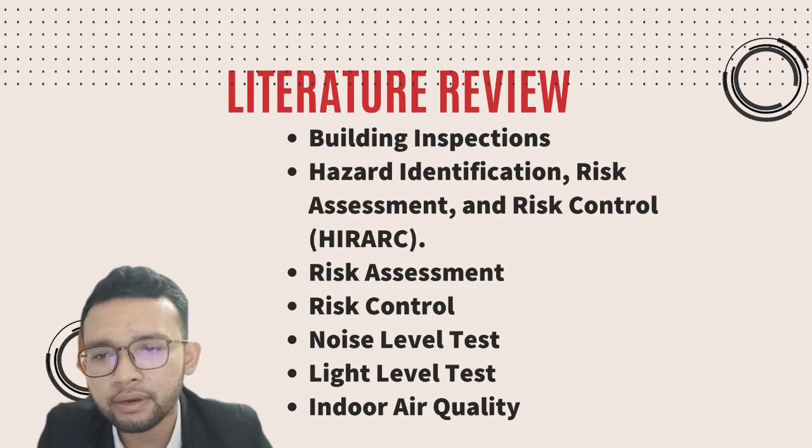Next is indoor air quality. Environmental indoor air quality is a critical factor in worker occupational safety and health issues. Carbon dioxide, or CO2, sensors are used in advanced HVAC systems to trigger an alarm and control airflow. Next, we move to problem statement and objective.

For the current scenario, PP Universal Engineering Enterprise, there are always challenges on the manufacturing line that may disrupt production output, and the workplace layout may risk the safety of the machinery and workers.

Second, workers will be exposed to hazard and risk when working with larger machinery, raw material, and tools. It may cause injury or death if workers on the production line are not reminded of safe work practice and do not wear personal protective equipment while working.

And lastly, the working environment in the factory. The factory has dust, and workers will be subjected to loud noise when performing welding, grinding, and machining operations in the factory. This issue may endanger the worker's vision and hearing.

During the grinding process, the worker's working position appears unnatural and uncomfortable.

How to overcome this: in the manufacturing line, a light and noise level test must also be performed to evaluate the current brightness and noise exposure.

We can also assist the organization in reducing and eliminating hazard and risk exposed to the worker by implementing hazard risk assessment. Next, we can also overcome this problem by ensuring all the SSOP related to the machine must be updated.

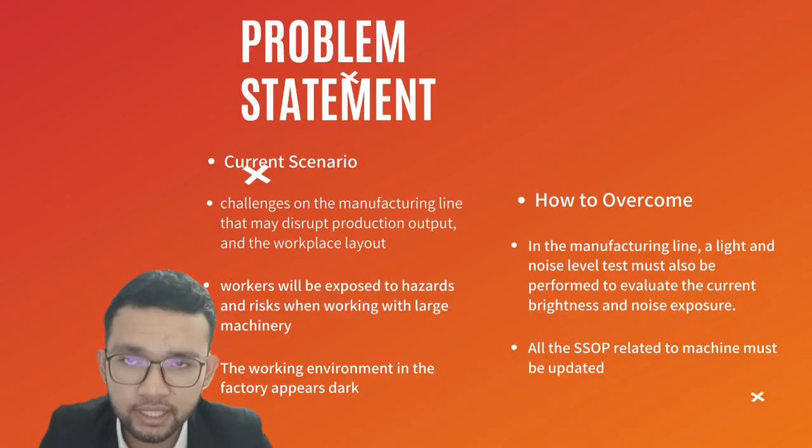Next, we move to the objective. The main objective of this study at the machinery company, PP Universal Engineering Enterprise, is first, to identify and analyze hazard and the potential risk to the worker at PP Universal Engineering Enterprise.

Second is to measure and analyze the parameters of noise level, illuminance level for lighting condition, indoor air quality, and risk level for working posture at PP Universal Engineering Enterprise.

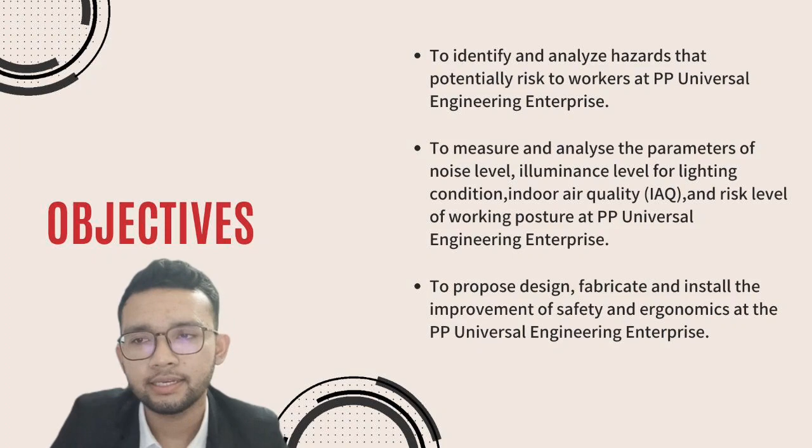The last objective is to propose, design, fabricate, and install the improvement of safety and ergonomy at PP Universal Engineering Enterprise. The scope of project and limitation of the project.

As a result, various parameters will be scrutinized during the process, including risk identification, noise level, light level, ergonomic, engineering, and administration. For the limitation, we identify cost and discipline.

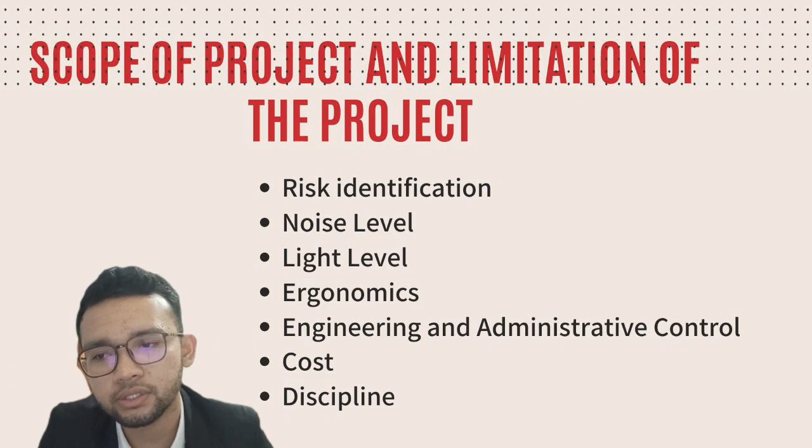Next, I will present the significance of the study. The first significance is to the environment.

This final year project study can lead to creating a safe and secure environment at the workplace so that workers can work safely without worrying about their safety when working. Besides that, the production of the product can also increase because no injury occurs to the workers.

Next is about economy. This project will help the company avoid spending extra money on ergonomic design and analyzing the discomfort and bad posture of the worker during working activity.

Furthermore, the company can also save the budget from spending on repairing damaged equipment if an accident related to the company occurs.

And lastly is social. This project will help the worker give full effort during working because they can do the working activity in comfort and with the right posture, so their body can feel more healthy, which can indirectly increase the efficiency of work.

For the methodology, we start with hazard identification, risk assessment, and risk control. Following the HIRARC flowchart, we categorize the work activity, then hazard identification, risk assessment, and followed by risk control. For the work activity, we carry out at machining, grinding, and welding area, due to this working area having high risk and high potential to occur hazard for the workers at PP Universal Engineering.

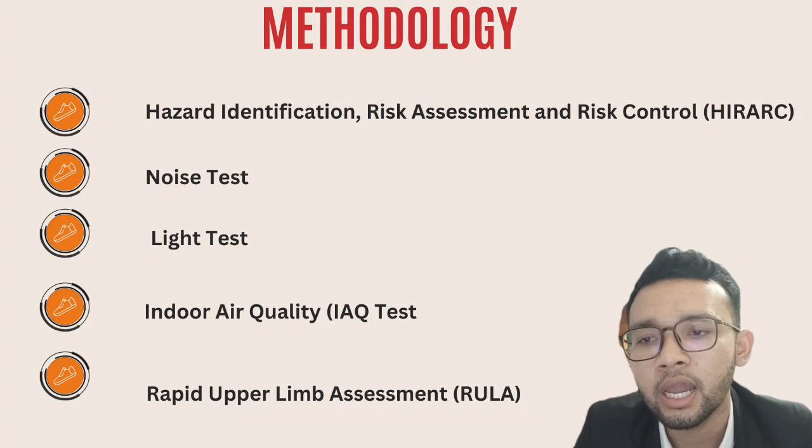And for the last is Rapid Upper Limb Assessment, or RULA. The working posture of employees in the production line at the equipment company has been chosen to be examined and analyzed in order to improve the health of the company employees. This is important to identify the posture of the worker during working and propose the ergonomic design to improve the safety and health for the worker.

Next, I will present the expected result. In this table, I have 8 risk control activities. First is analyze building inspection, machine inspection, and HIRARC. Second is analyze fire requirement for building and propose improvement related to fire requirement.

Third is sound level test for testing room and metal workshop room. Next is light measurement test at the testing room and metal workshop room. Next is indoor air quality IAQ test for testing room and metal workshop room. Next is analyze ergonomic at workplace by RULA and propose ergonomic design for machinery. Next is to design machine guard for protective guard, which is drilling machine, skinning machine, gas cylinder, and welding section.

And last is design the SSOP machine. For example, SOP for circular saw machine, lathe machine, welding machine, and milling machine.

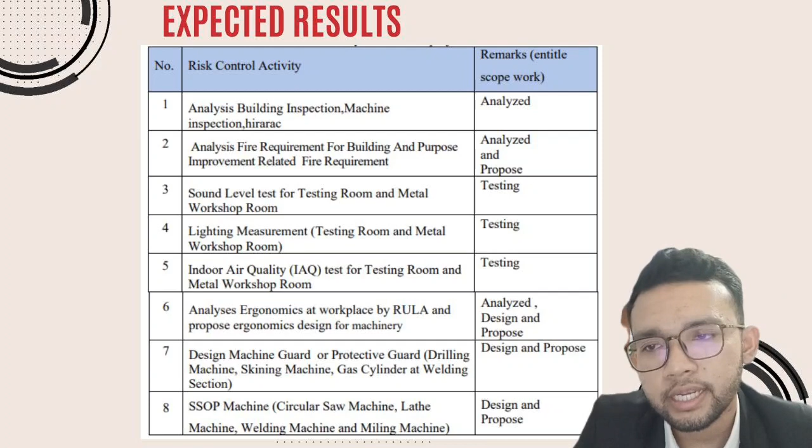This is the table for noise level test result. I selected different locations and used a Castle 6224 and Sound Meter Decibel Meter app to measure the sound at PP Universal Engineering. And for the light test result, I also used 3 different locations, and the equipment I used is Testo 440, and for the application on the phone it's Lux Light Meter Pro app.

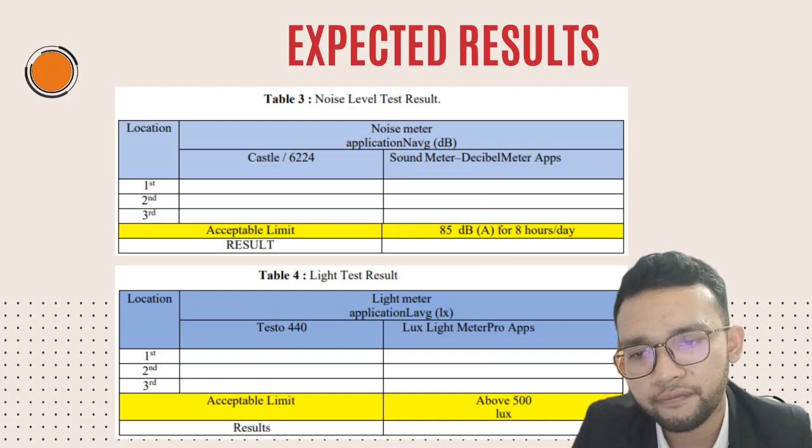So we can see that for the noise level test, the acceptable limit is 85 dB per 8 hours per day. And for the light test, the value must be above 500 lux.

This is the expected result for IAQ test. For the IAQ test, we measure the temperature, relative humidity, carbon monoxide, and carbon dioxide. So for the reading, we calculate the average, and after we have the average value, we conclude whether the environment at PP Universal Engineering is safe or not for the worker to work.

I think that's all from me. Thank you.